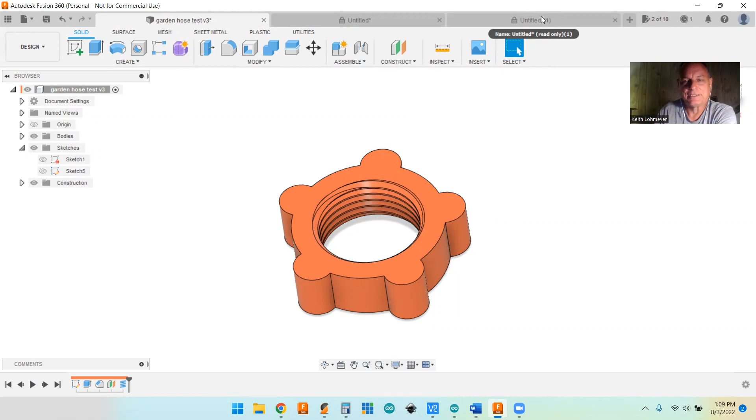But I'm going to do the homework the way Paul does it. I know one way of putting knurls on an object. There may be others, but we'll go ahead and put it on the way I think works.

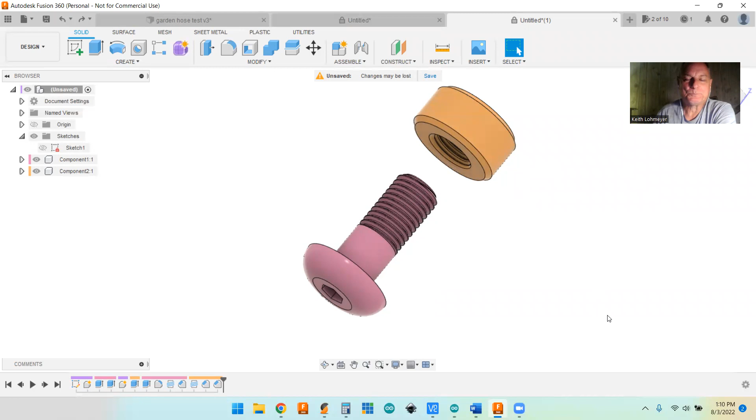So I started off and created a socket head cap screw, or actually a button head cap screw, got threads on it and nice chamfered sides. You can see my last video to see how I overcame the problem of putting chamfers on your threads. But our job today is to put some knurling on that, so let's get to that.

So the way I would do it is I'm going to use the Coil Tool. As you can see, I took the round and put some nice chamfers on there just to get us started.

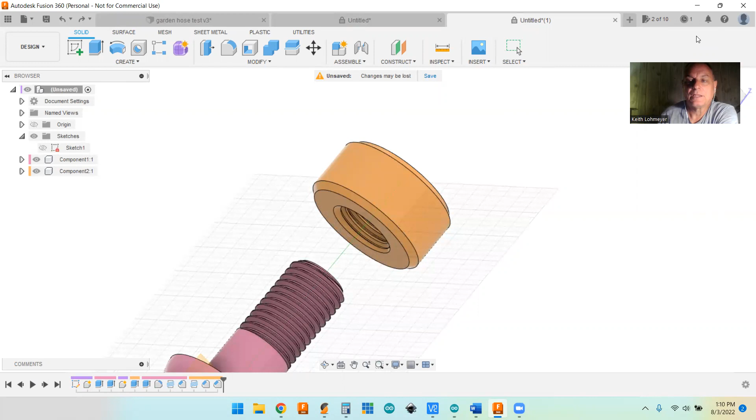So go down to the Coil Tool. Let me move myself out of the way here. The Coil Tool, if you let your mouse sit, tells you to select a plane or planar face. We want to put it on this face here—we could put it on the top one. Let's put it on the top one instead. That's our face, right? Now it's asking for a center point, and the center point would be there.

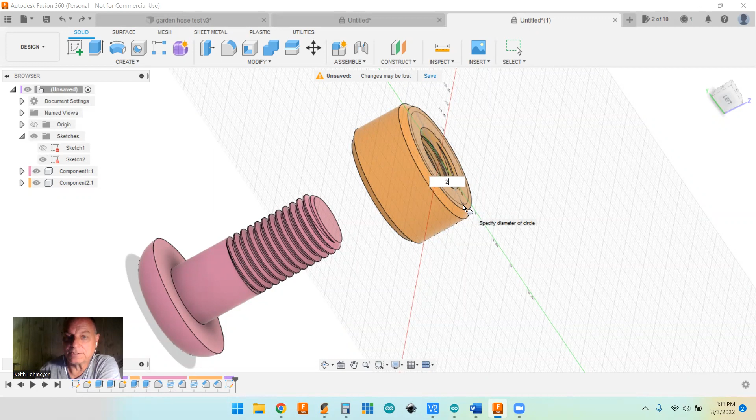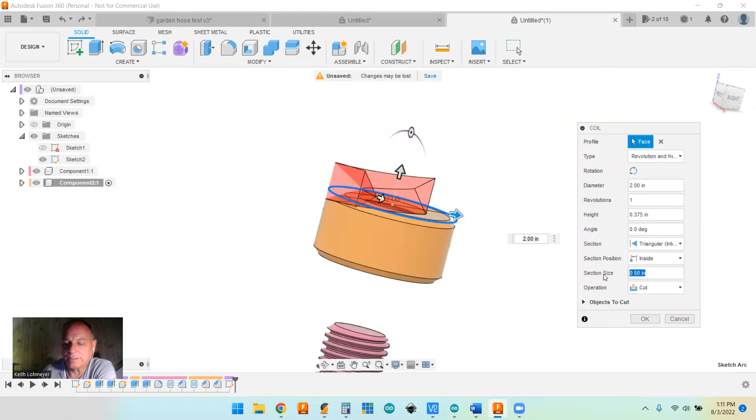We want a triangle, but we don't want anything that big, so let's do 0.05. To do this right, we've got our 2-inch diameter, and we're going to do revolutions in height. We want just half a revolution for this, and our height—the height of our nut is 1 inch—so we want one there.

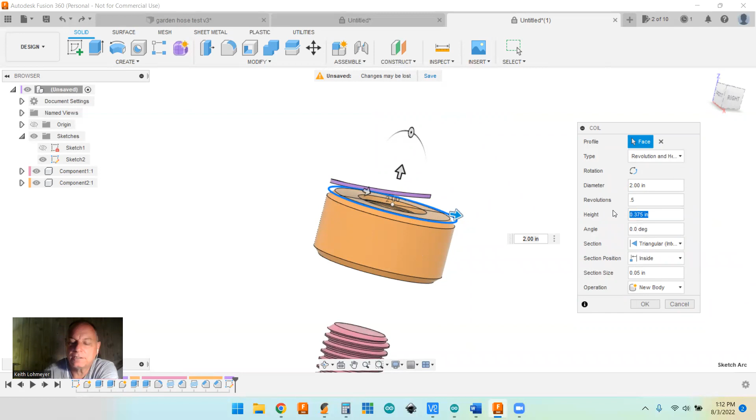Oops, so it's going up—you never know whether Fusion's going to go up or down. So we'll go down with it, 1. All right, and that takes care of that. Everything seems pretty good. We want to cut, so we can say okay to that.

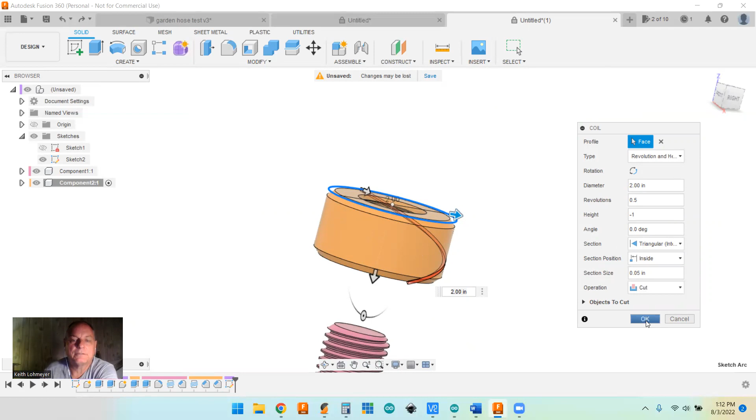And that gets us one way. But when we do this, we really want one going clockwise and one going counterclockwise. So we're going to do pretty much the same thing, except make it counterclockwise.

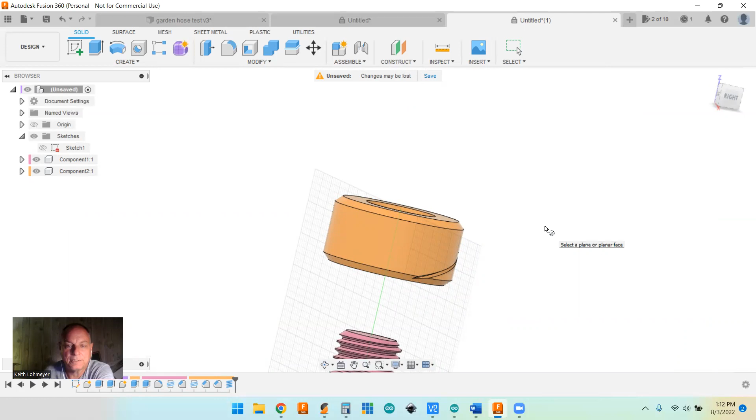So it's going to ask us for our face again. We got our face, we got our center. I'm going to bring it out to 2 inches.

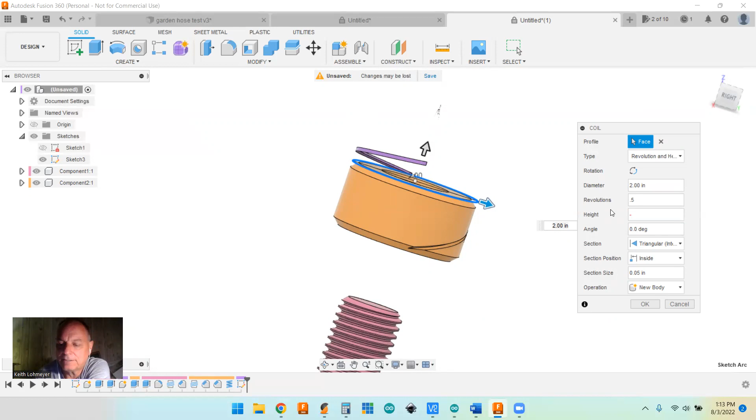Change these things again, 0.05—I'm in inches, so you'll have to make corrections for metric. 2-inch diameter, revolutions, we only want half, 0.5 revolution, and the height again I think it's going to be -1. It has us doing a new body, but we want to do a cut, and we also want to go the opposite direction.

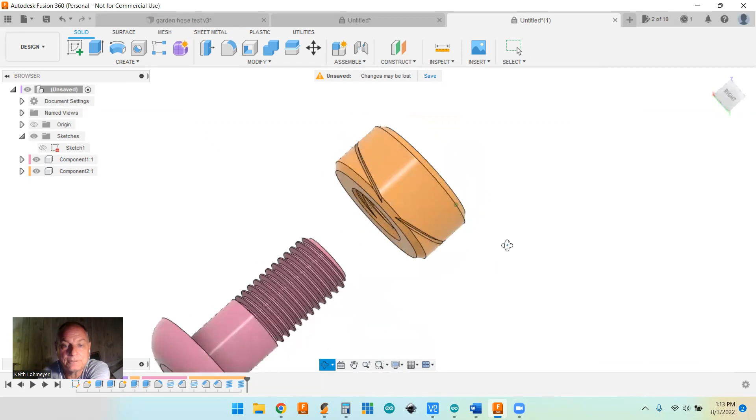There we go, so you can see now, and I think we're good. I can go ahead and hit OK. So what we end up with is just a couple of spirals cut into our thing. To make it more like a diamond type knurling, what we're going to do is take those two features we just created and do a circular pattern with them.

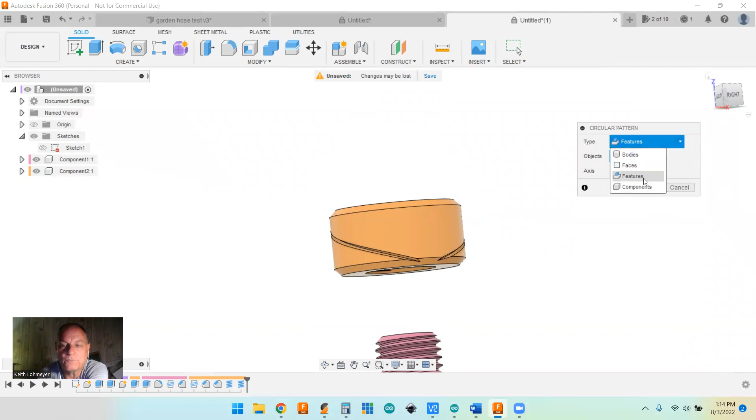So I'm going to say circular pattern. All right, and a lot of times this comes up to bodies or faces or something, but we want features, so features has to be clicked. The easiest way to select features is to go down in your timeline, hold control, and click two of them. So we selected two—it says two objects.

All right, now you need an axis to go around on, and we may have to...

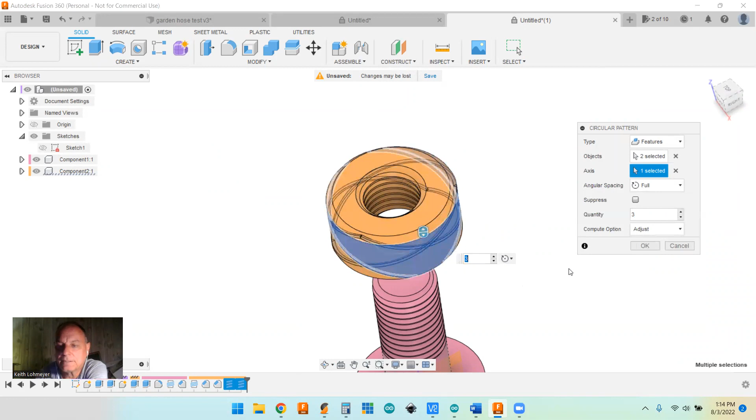All right, it's our axis. I think that worked out okay. I don't know, that doesn't look right, but let's try it. Just increase it. No, that's not right, so our axis is not right. Let's pick an axis again.

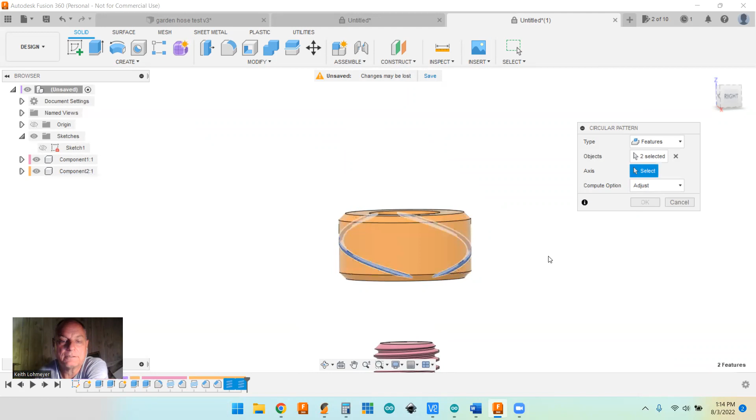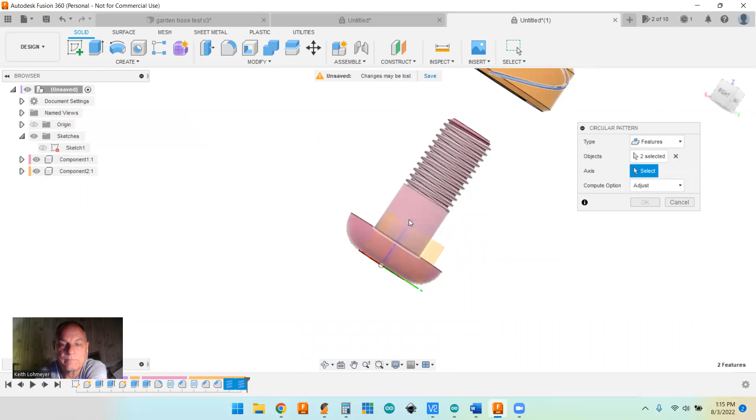The probably easiest way is to go up and get your axis right here. Oh my, I picked the wrong one again. We want the blue one. All right, bring it back down.

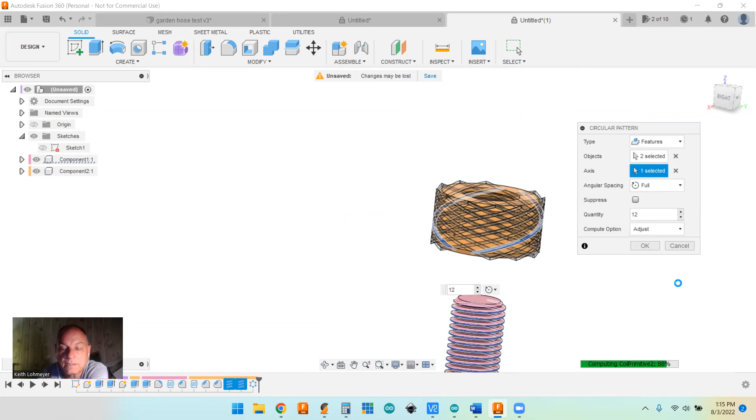We probably want this up to around somewhere around 12. And there we go, you saw my little green thing down there. When it does a knurling, it has a lot of calculations to do, so it's really heavy on Fusion 360. But anyhow, that's how you get a knurling pattern in Fusion.

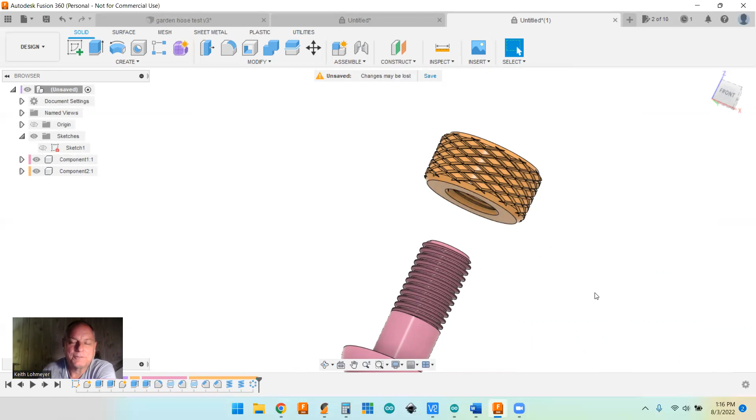So I did want to note, I noticed that some of the more advanced users have already figured out the assembly and movement things on here. So for anybody else that's interested, that's the knurling end of the video. But if you want to watch, I'm going to make it so that it looks like you can animate the threads on here, so that's all in the assembly setup.

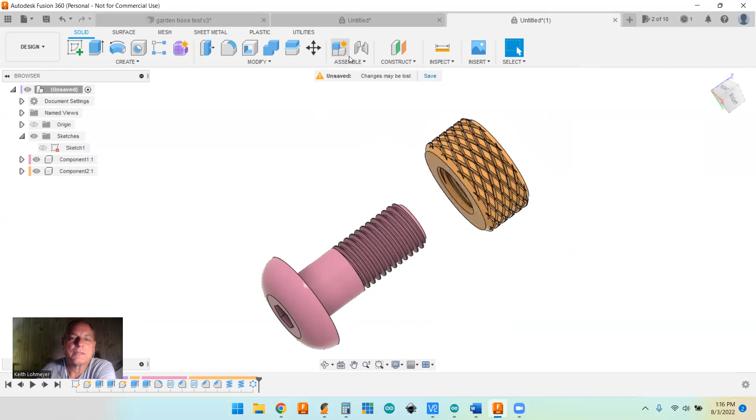So we'll go to assembly. We need to make a joint, so we have to pick a joint. When you do a joint, you look for these little coins, as some people call them. So let's say we want to make this, and then we can hover over here.

And you see the joint, but then when you go to the middle, it picks a lot of other stuff. So if you hover over it and you see that center dot, if you hold your control, then it's going to hold it and you can pick it. So we'll pick that.

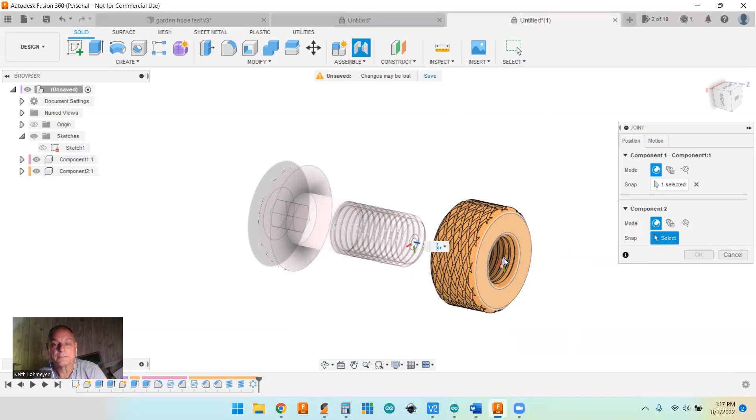And sometimes it does this backwards stuff, so you can hit this flip here and it'll change it around. All right, so that's our joint, and we got that modeled.

The only other thing we got to do, you see you got two tabs up here. We also want to change our motion. We actually have it on the right one, but a lot of times it'll be on one of these other ones. So we want the cylindrical one, and you want to make sure it's the X drive and X axis. So we got that, we'll hit OK on that.

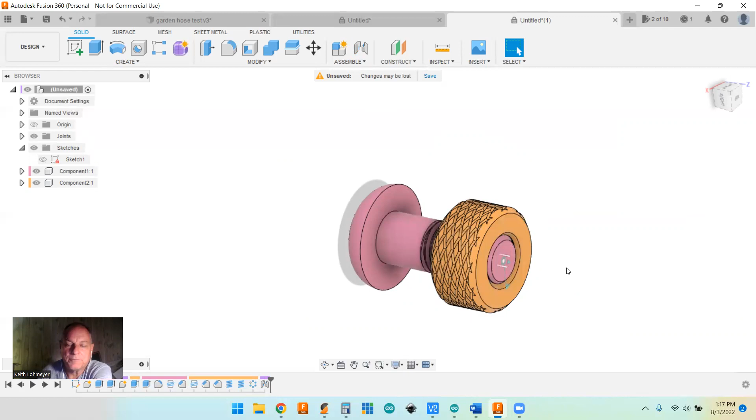All right, so we got that. Now to make stuff move, a lot of times everything moves when you do this. So what we have to do, you notice I got two different colors, because the only way to work in assembly is with components. So we got two components, one's for the nut and one for that.

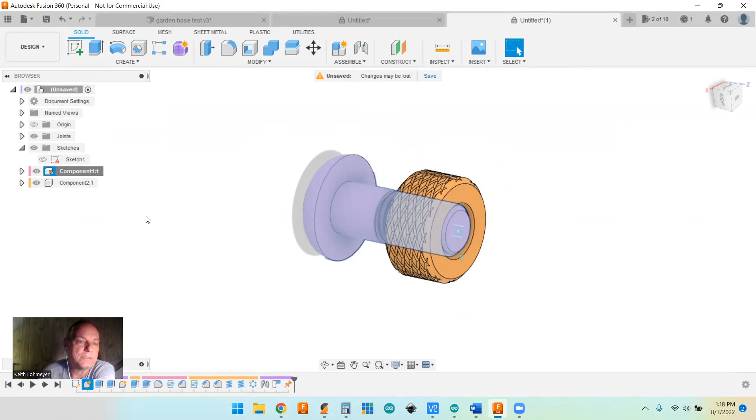So we want to take the purple component and right click on it, and they have this thing near the top that says ground it. What that does is kind of like putting it in a vise on the screen so that it doesn't move. So we're going to hit ground, and they always ask you this, and a lot of times I just usually say capture position. All right, so we got that.

Now we should be able to move this, and you can spin it. Because we said cylindrical, it means it can go back and forth and it can go around in the circle. But that's certainly not anything like we want.

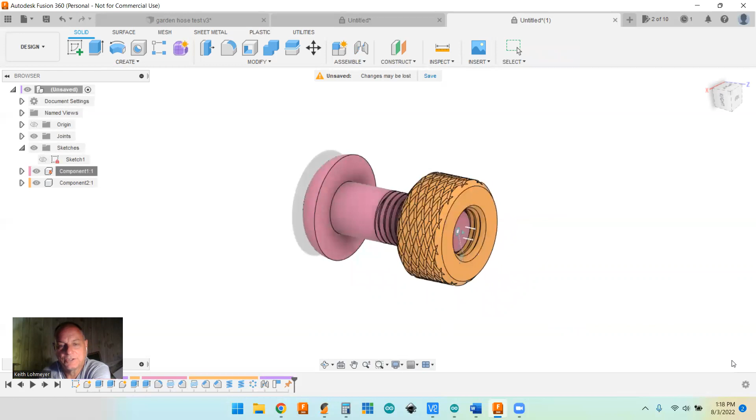So we have to go in here and set a couple things on our thing. We're going to go up here in assembly, and first we want to keep it so that it doesn't go all the way through. So that's actually somewhere else. You have this thing called joints up here, so you can do that. And you see you get the one cylindrical joint. You got this little button next to it, and you click on that to be able to set the joint limits.

Okay, so right now it's set to rotate, but we don't want that. We want it to slide. We want to make sure that it doesn't slide past the end of my threads here. And I'm also going to make it so it comes part of the way out of the threads, but not all the way off.

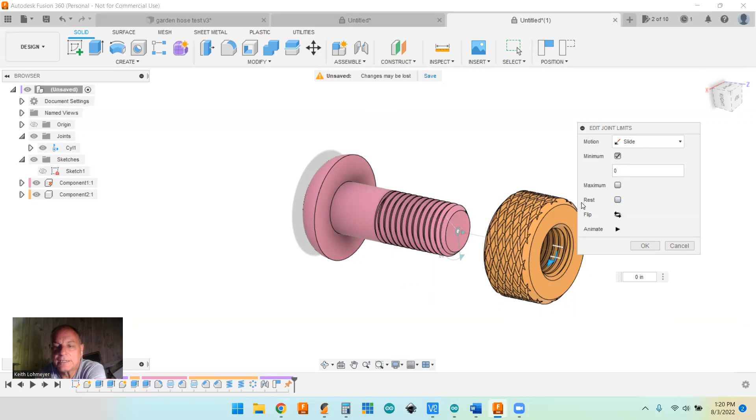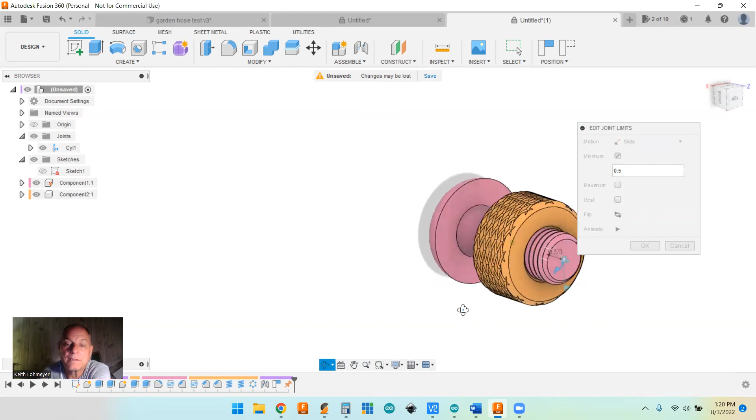So we want to set our minimum. A lot of times this is kind of hard to do, so I just set 0 in there. And you see that's where 0 is. So I know that I put 1.5 inches of threads, and this is 1 inch, so I know I want to go back 0.5. And if you see it, it goes to the end of the threads.

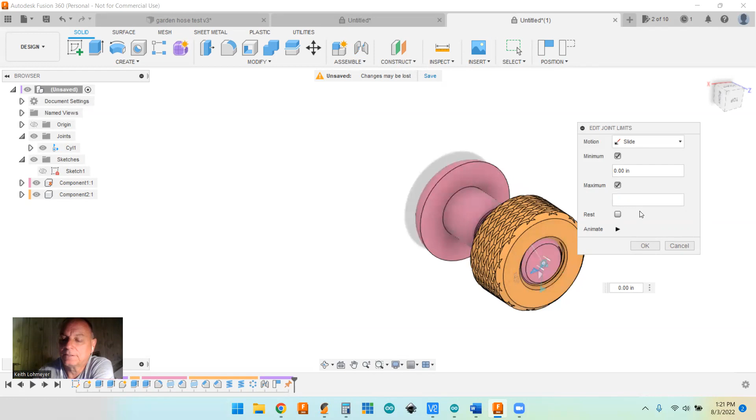Alright, then we want to click on our maximum. We knew that if we put 0 in here, it comes to there, but we wanted it to come part of the way off. So we actually wanted to say, let's see, maybe 0.6, negative 0.6. As you can tell, I don't do this very often either. Other people I've seen look much better at it than I am.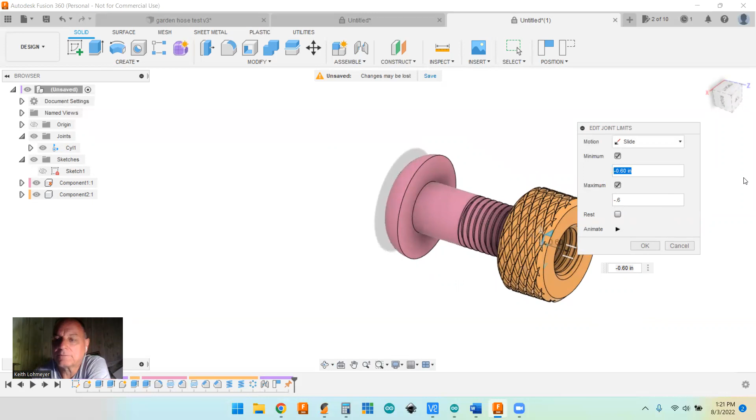I thought this one was 0.5. Yeah, alright.

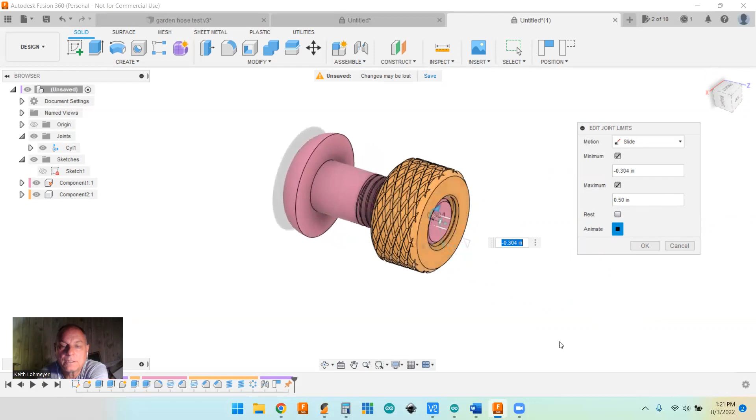And then you can animate it. Let's see what happens when we animate it. I'm not moving at all. There we go. That's the limits of it now. So that's good, alright.

So that set our limits for us, but that doesn't allow us to do, now we can turn it, but you can still slide it, and threads don't slide. So we can go back up here to assembly, and we call for, I think it's motion link.

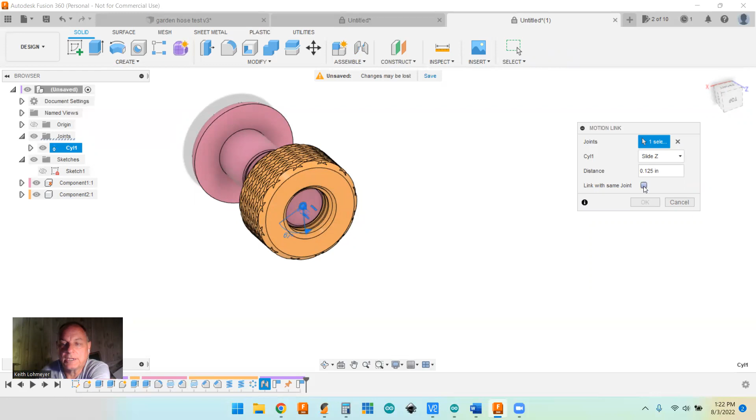And we want to capture position again. Alright, so it wants to know what joint we want to work with, so I'll select the one that's in there. We could also go over here and select it, so you can either do it on the thing or go to your tree and get it. But we want these joints to work together, so we want to click on this link joints. So we want that, alright.

So you can see it's got like a timeline there. A lot of times this will be spinning different than what your threads are, but it looks like it's probably close to it. That's because this is the second time I've done this, so it's got some settings in there.

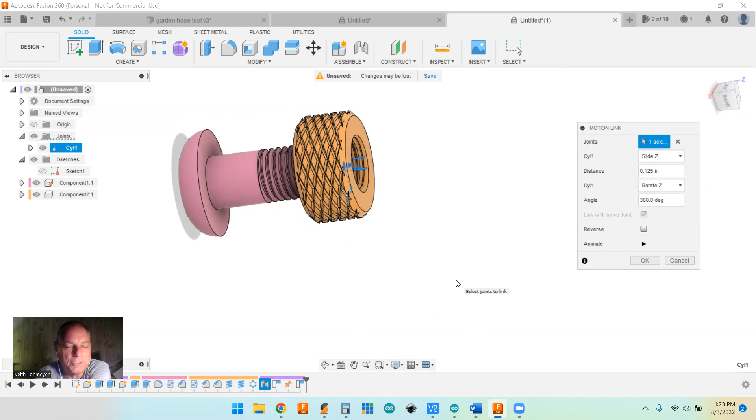So if you notice that one revolution is moving more than a thread length on your bolt, then what you really need is, in metric it's easy, it's the pitch of whatever pitch you have for your threads. That's what you want to put in here. With us, we want to do 1/4... this is 8 threads per inch on this, so 1/8 is 0.125. So that's what that is.

And you want to make sure this angle is 360. So let's just change this. The distance would be 0.5.

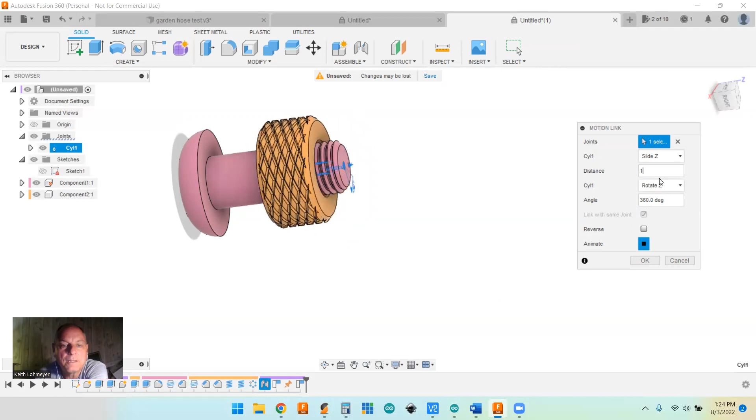And now we can animate it. And let's try 1. Yeah, see, it's like less than 1 turn is taking it all the way on and off. So we want to go back to 0.125.

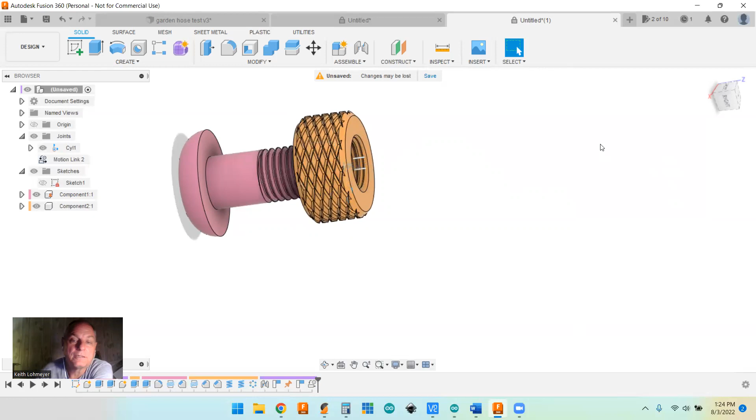Alright, so that's how you set that, that's in Motion Link, and you can hit OK. And then we should be able to grab it and just spin it around. Sometimes you just... there you go. Now we're all the way up against our stop. And we can come back out.

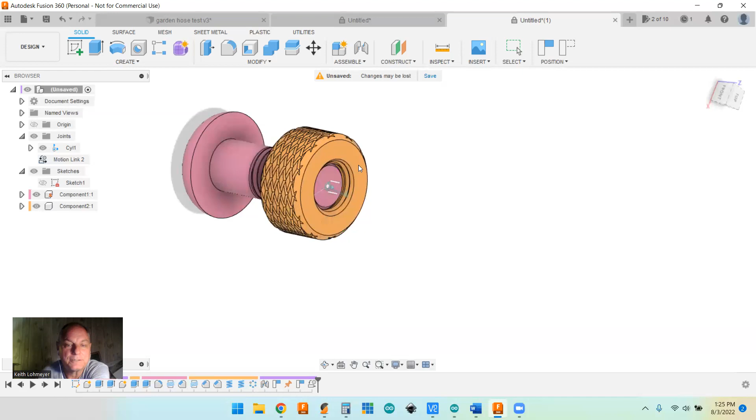And one way you can notice that you've got your right threads per inch is that when you're spinning and moving, the internal threads stay the same. You see they're not really moving at all until you get to the end.

Anyhow, that's how you get motion in your assembly and everything like that. I'm not that great at it, but I figured I'd show how I do it. Paul might get to that eventually. That's kind of an advanced feature, so I don't know.